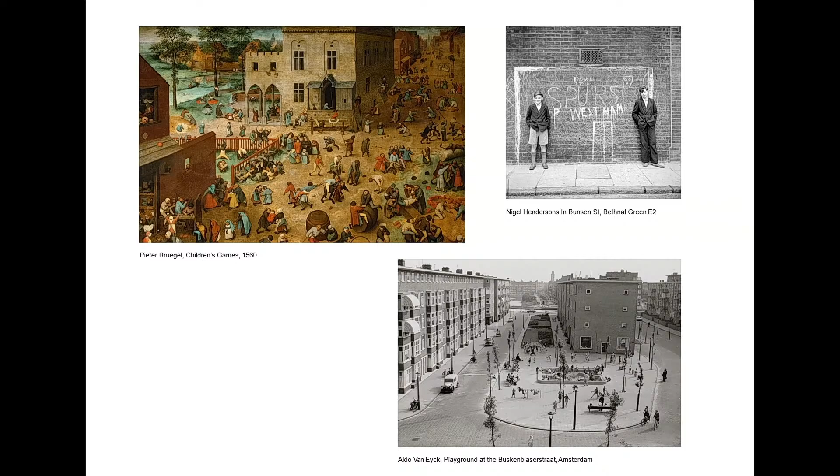So we like to mix the scale, and this desire to mix scale led us a few years ago to explore sports and play in the city, which is this rare moment when uses emerge quite directly from space. So in 2014, we proposed a research to Pavillon de l'Arsenal, a Parisian Institute of Architecture, on the typology of sport in Paris.

Traditionally, architecture for sport is considered a technical topic drawn by specialist architects, but we had the intuition that it could be a subject of research and experimentation for architects, as in our view it's a very urban typology, with super varied urban situations, from spontaneous practice like running, to infrastructure like the Parc des Princes.

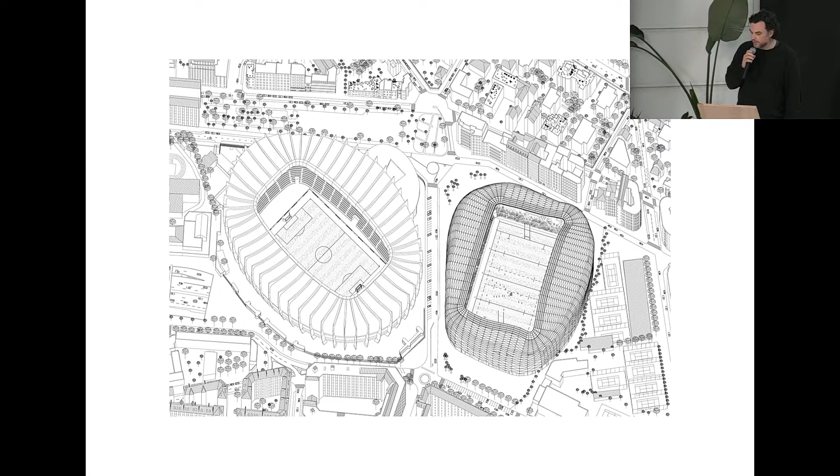This research was a pretext to talk about urban architecture, about spatial situations that create the atmosphere of a city, its climate and its specificity. We do believe that at the end, architecture is an urban matter. Architecture needs for us to have an urban intention in its genre. It is a convergent moment of space feeling and city feeling about climate.

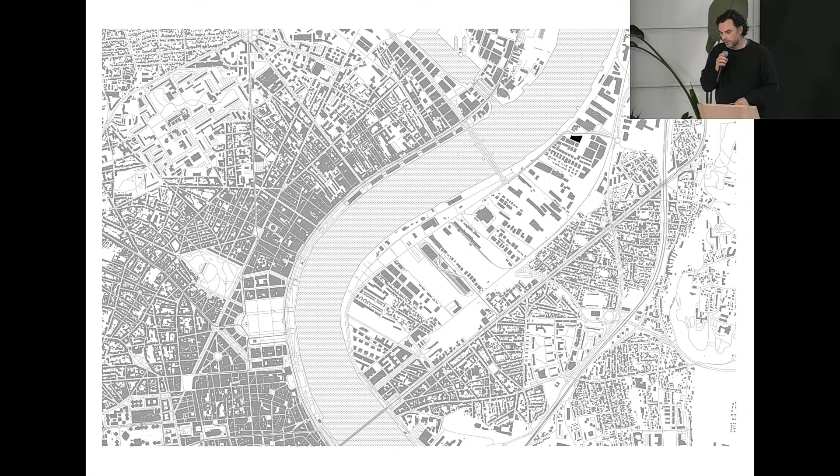So the first project is in Bordeaux. It's a sports project, south of France, close to Spain. It's out of the city in a neighborhood which is in total renovation. It was an old fabrics district, and the city asked us to create a sport facility, a building which hosts a sport facility.

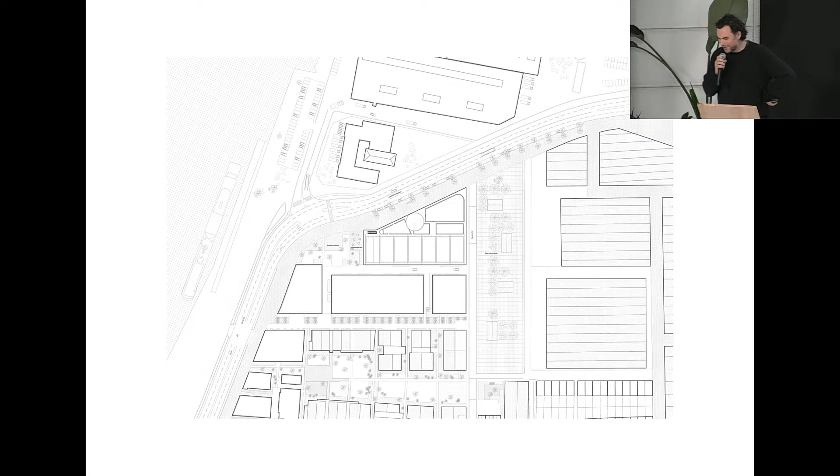But everything around is new, and there was an urban planner, an urbanist, who wanted a building that has the power, the possibility, to activate public space, as everything is going to be new and mostly around the dwellings.

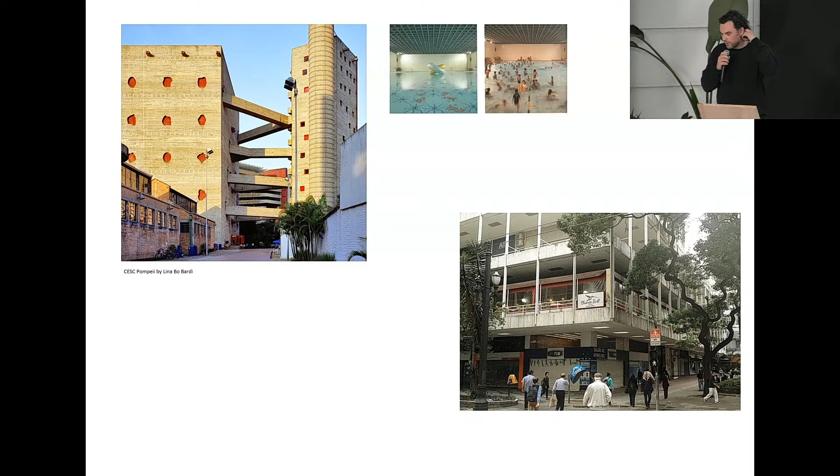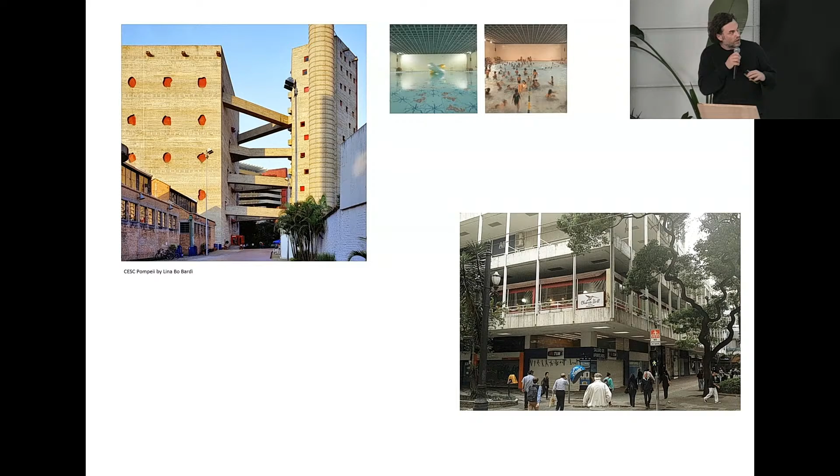So for a vertical sport facility, we obviously had in mind the CESC Pompeii from Lina Bo Bardi, which is largely made of a platform 100% dedicated to sport, and which is also largely open to the city with these red windows.

So we propose a building that is very open to outside, a kind of layering of urban planes, which hosts a large variety of sport fields, like golf, climbing, etc.

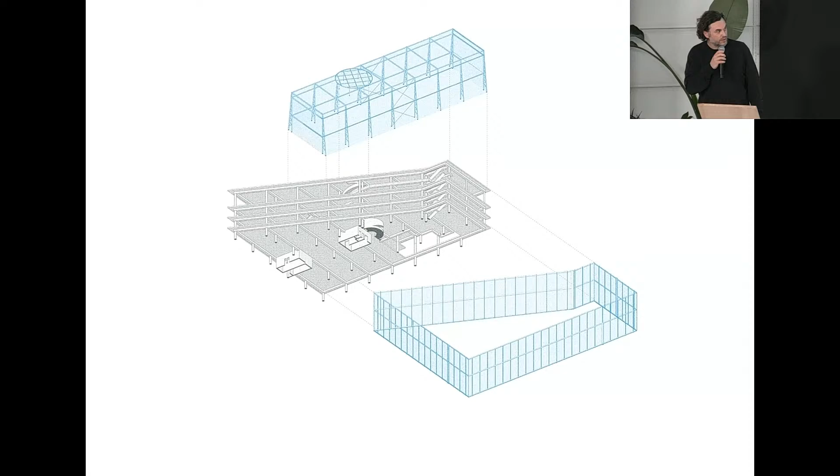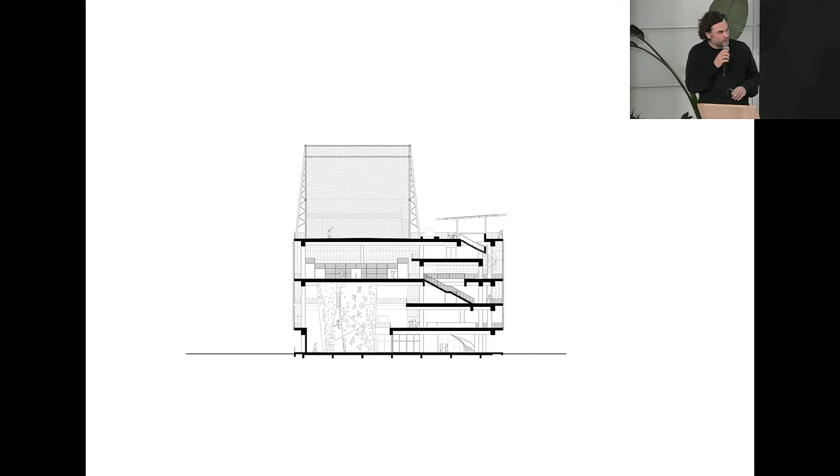Here you can see the structural principle of the building, which might appear really simple. It's like a precast building, everything is really regular. But when we look at the section, the construction reality appears, and we can see that the regularity is stopped a lot of times to host spaces which are really larger and some really tinier, with a large difference of events.

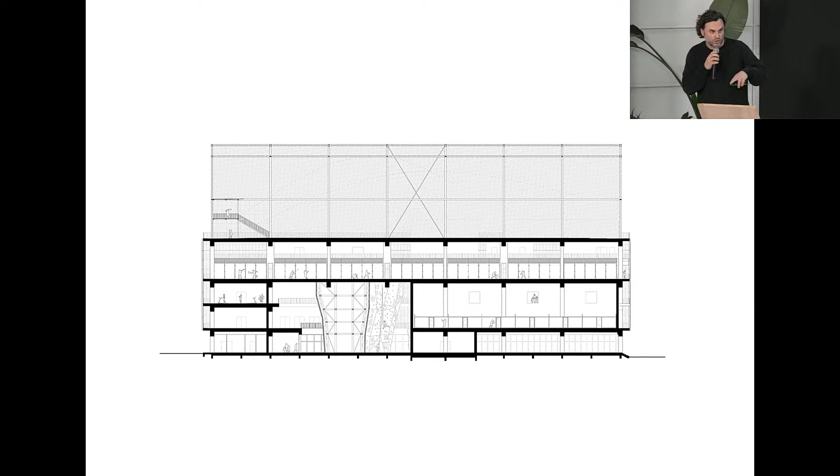The building which is built is like 20 meters high, and on top of it there is this golf practice cage which doubles the size of the building. So it's a 40 meters high building at the end.

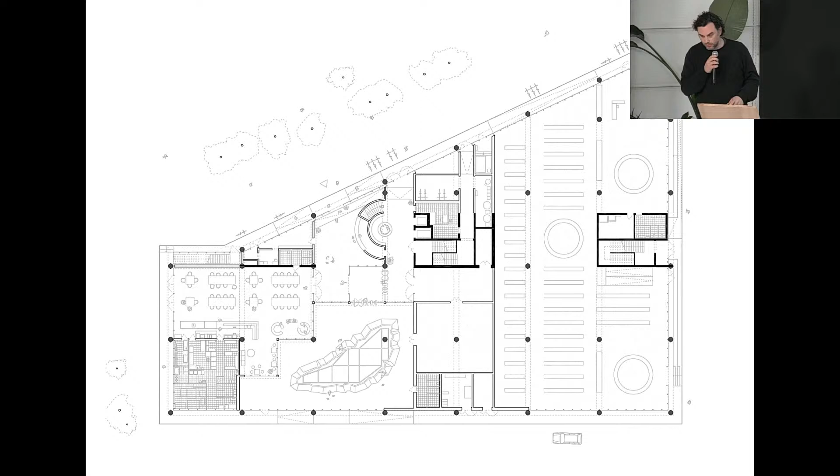So here is the ground floor, where there are a few spaces which are inside, I would say, like a restaurant and some shops on the right. But most of the building is an outside program, and we like that the plan is totally not efficient — only 30% of the building is heated inside space.

So there are 3 different kinds of space: the heated one, 30%, the one with programmation which is something like 50% more, and 20% of the built surface which is only circulation, large circulation, dedicated to improvisation and something that we can't manage, but the life of the building.

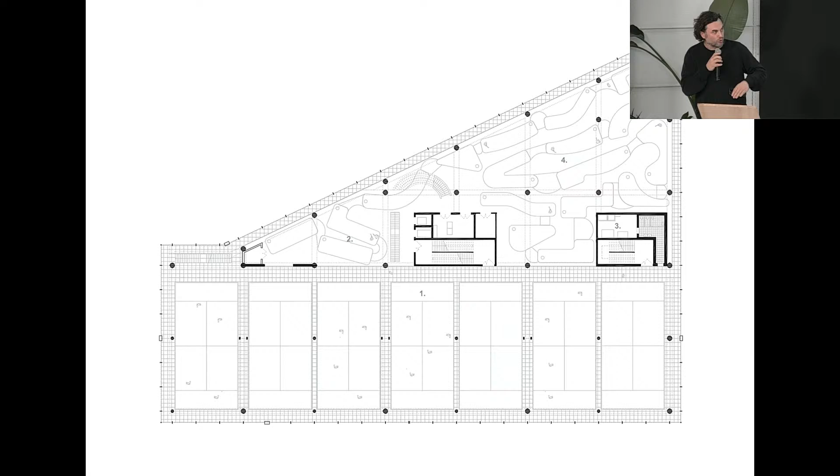This is the largest surface, it's 10 meters by 20, and so all the building is about 10 meters by 10 meters grid. And the roof plan with the golf and the bar facilities.

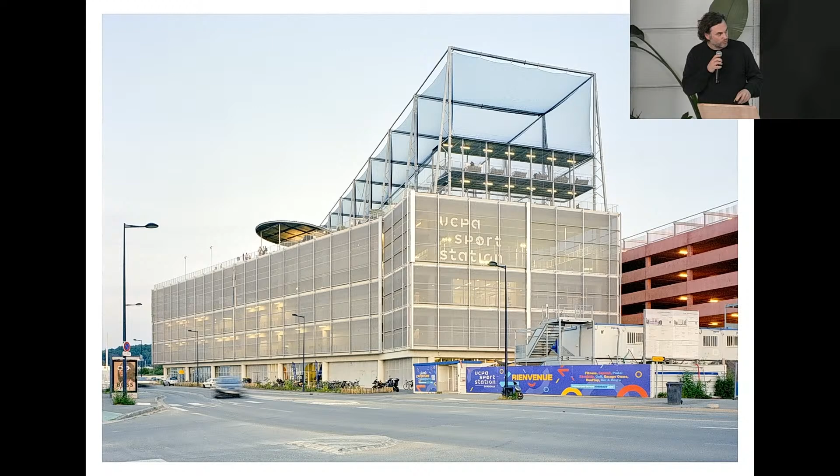So the district around is not completed yet, everything is in construction. If you go there now, it's a bit more constructed, but more or less it's like this. This picture is one year ago.

For us, there was this question of how a building can discuss with the surrounding. Creating this outside space inside a building was an economic strategy for sure, but it was also the possibility to create this kind of moment where the facade is totally removed and totally open to outside.

So the facade is built with a net, like an agricultural net. It's one motorization for the 70 meters lines of the facade, so one motor for each facade, not more.

It creates this moment where all the circulation inside is visible, all the activity is visible, the in-plus activity, let's say, not the pure sport, but when you are training or doing your stuff, you are outside and linked with the surrounding.

So there is a super regular structural frame and some spaces which are programmed. It's not superposed, everyone has its own specificity, because sport is one of the programs which you can't negotiate with, the dimension of the sport field.

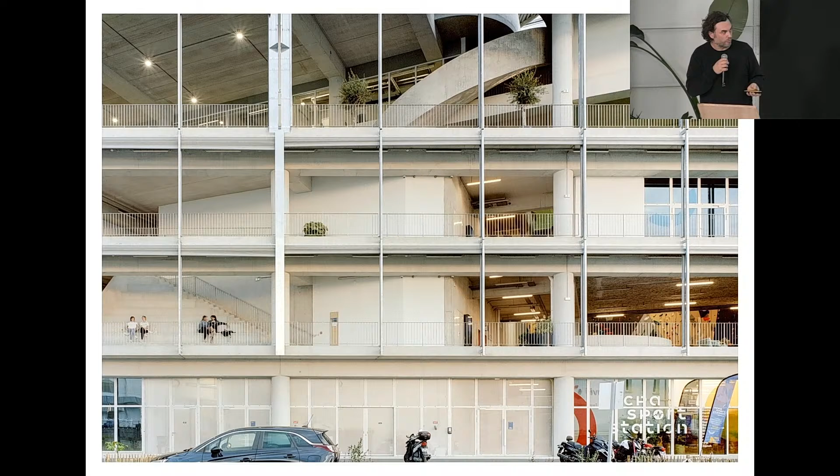So we are on the third floor in a golf moment, and we are quite close to this net facade, which is black from outside, but from inside with a counter day, you see clearly to outside.

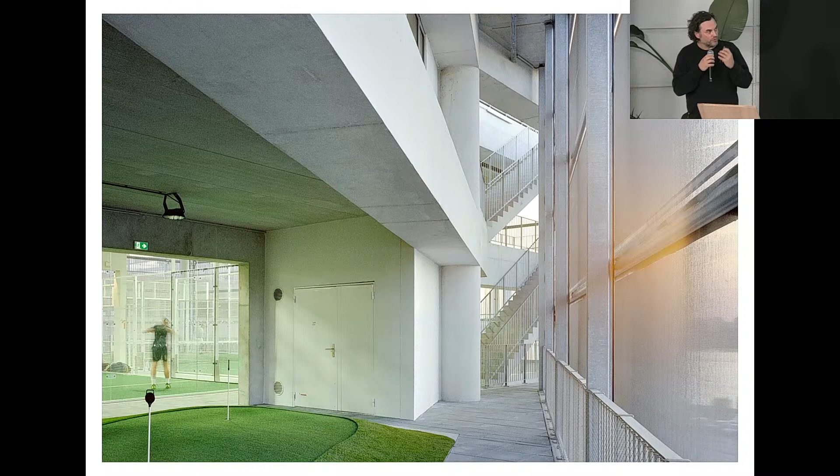The interest of this facade is clearly climatic, because it's created like in agricultural buildings. It's for wind, it's to stop wind. It stops more than 70% of the wind, and for sport that's something important.

So inside it's quiet. I mean, during winter it's cold, but it's a sports moment, so you can practice sport when it's cold, but you don't have this feeling of wind that can be difficult to deal with.

It's also efficient during summer because it stops all the sun, and it was also a longer study because there is also this fire constraint that if we don't want, for economic reasons, to have a lot of machines to deal with the smoke and etc.

It needs to be 50% open. So there are a lot of holes and it's 50% open, but it creates this nice moment where you are protected inside, but you see clearly outside.

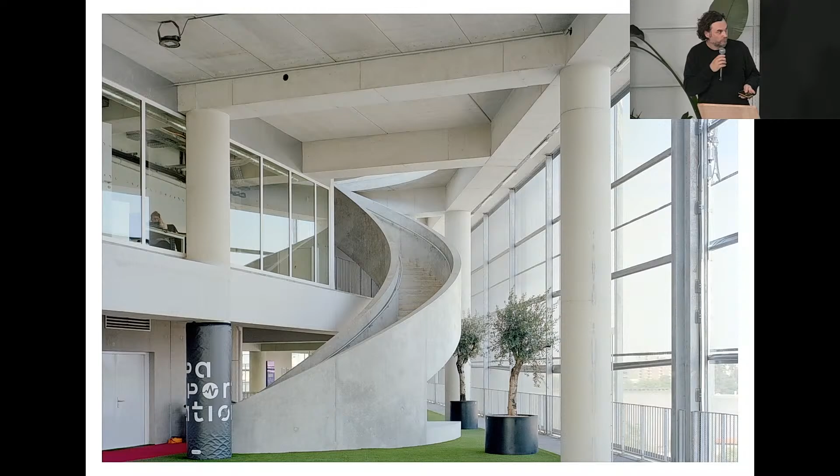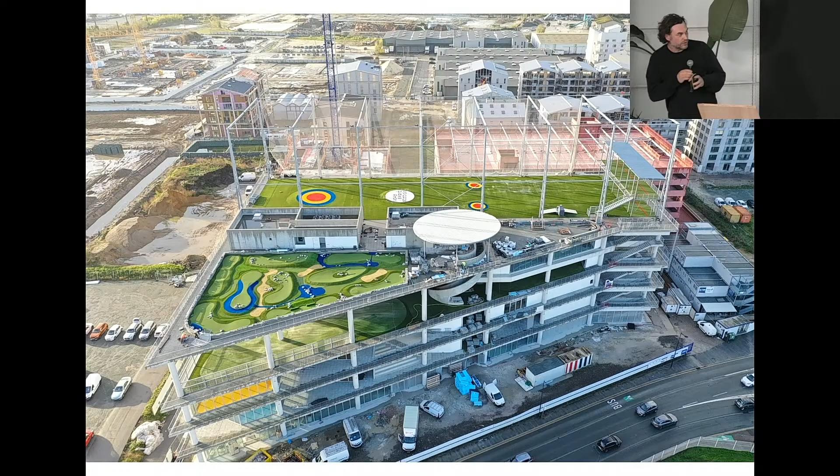So this first series of photos was made by Maxime Delvaux, and a few months ago our friend Antoine Espinasseau came, and the building started to live, like life.

We were super surprised and interested to see all these people all around, with the guys exercising themselves all around the building before practicing sport. It's really pleasant after all this engagement to see life in the building, but particularly on this building, which is about showing the practice everywhere.

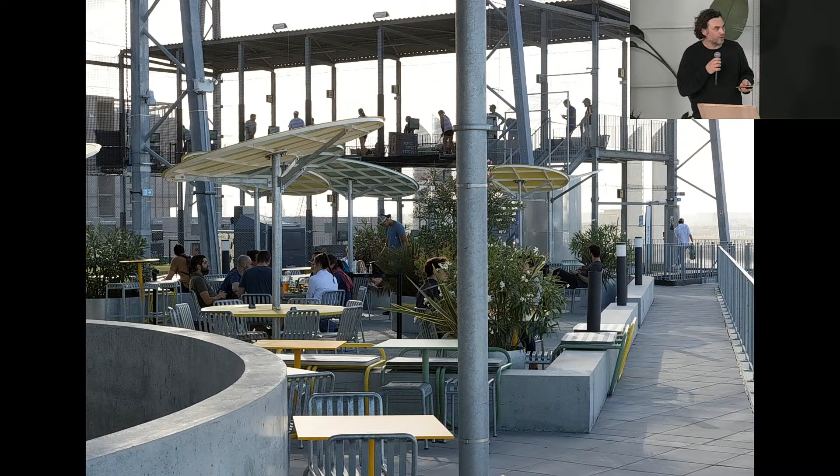So it's a bit more in construction, but still, depending on if the net is open or closed, the entire building evolves depending on the situation, on the climate situation.

So the second project is not a sport one, it's an architectural school. It's a contest that we won like 8 years ago. It's in Marseille.

I don't know if you know the old school of Marseille, but it was in a kind of lost paradise, close to the sea, like some American campus typology, far away from the city. And at the moment they needed to renovate this building, they took the decision to put it back in the center of the city.

And we started our study over there, in fact our first two years. And we were a bit questioning ourselves because the building is super nice, it's a super nice moment to live, and it's a good building to learn architecture.

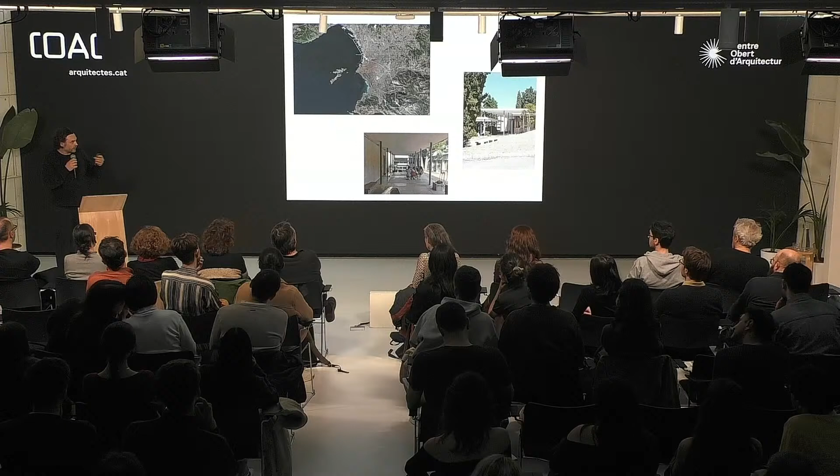But also putting the architectural school in the center of the city, we saw it like a political moment to bring back the school where we speak about the city. Being in the center was something that was also interesting for us.

So it's 3 schools of urban design: the School of Architecture, the School of Landscape, and the School of Urbanism. Three different schools, and there is this goal to make this building speak with the district, but also to let the 3 schools merge their students. So we built 3 different buildings, but to mix the different functions.

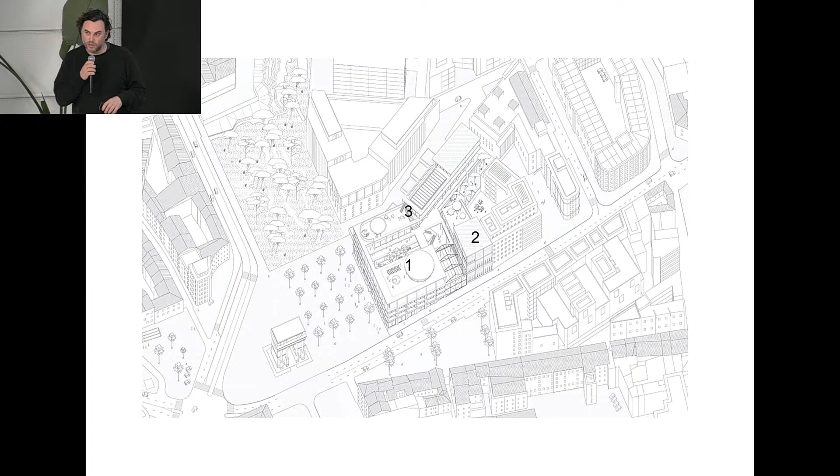So 3 buildings, but not for 3 schools. One is dedicated to common space, like administration, a library, etc. The second is dedicated to research and experimentation, like a model workshop. The third is dedicated to the students, so a students' workshop. So all the different school students and functions are mixed in the different buildings.

It's in the center of a city, in a patrimonial moment. So we also had this question - I mean it's a school of architecture, as we used to learn over there, and it was a bit larger. We were young at this moment, and it was a big subject for us, and plus it's in a patrimonial surrounding.

So we discussed a lot with Jacques Lucan, who was part of the team, a researcher and historian. And at the end we found these references of Italian palazzo to speak of what could be regularity plus exception. And those have been made over time, so they evolve.

So it's clear, when you are far away you see something super classic, super composed. When you look precisely at the different moments, you see it was an old church which became a city town hall. So you feel you understand how it was made, but from far away it's something really composed.

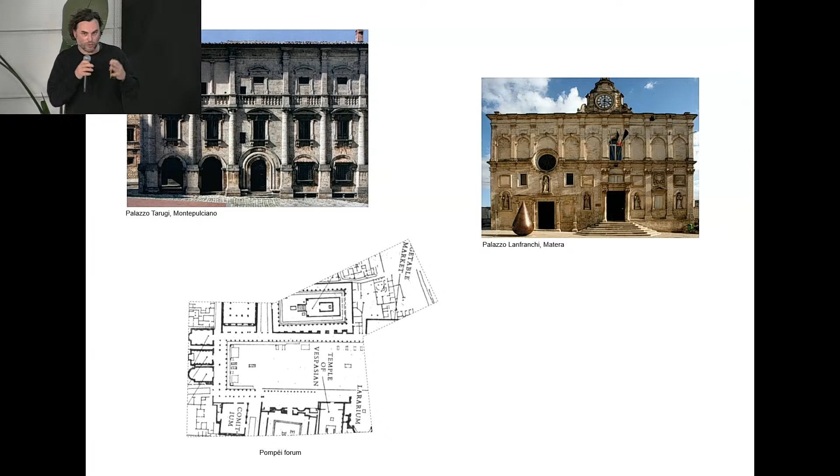So we quite like the idea that a building can be read from far away, but it's different when you go closer. So here you see the 3 buildings, which also is a bioclimatic strategy, because there is a lot of wind in Marseille.

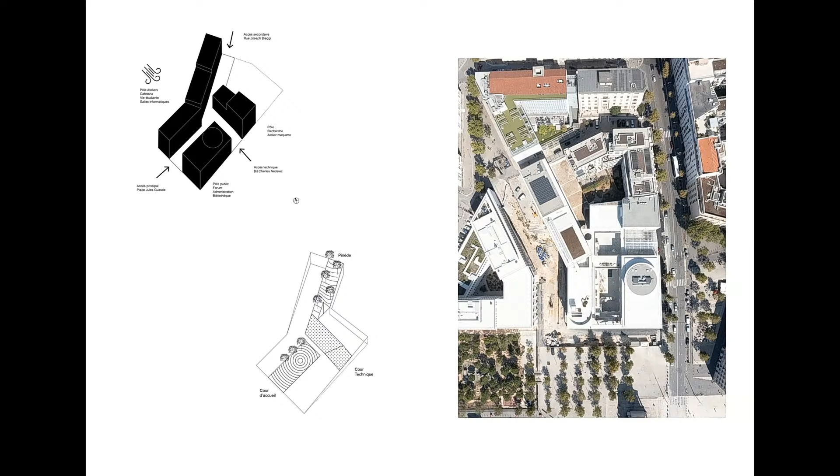So the long building is stopping the wind. It's 13 meters deep, so all the students' workshops are open on each side, so you can do ventilation quite easily. The public building with all the large moments like a forum and library is 20 meters deep, so there's a lot of inertia.

And the research one is open, has a different facade. So these 3 buildings create 3 different voids, which are also aligned with the topography of the site, which is 10 meters difference between the lowest point and the highest one, and each one has a different thematic, let's say.

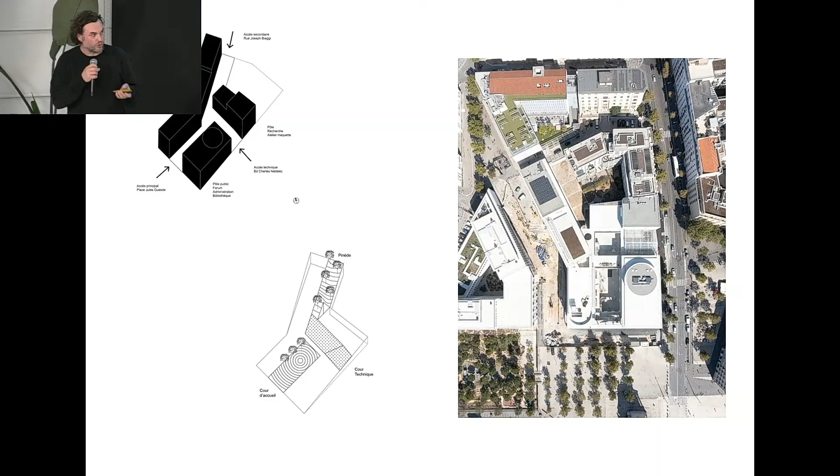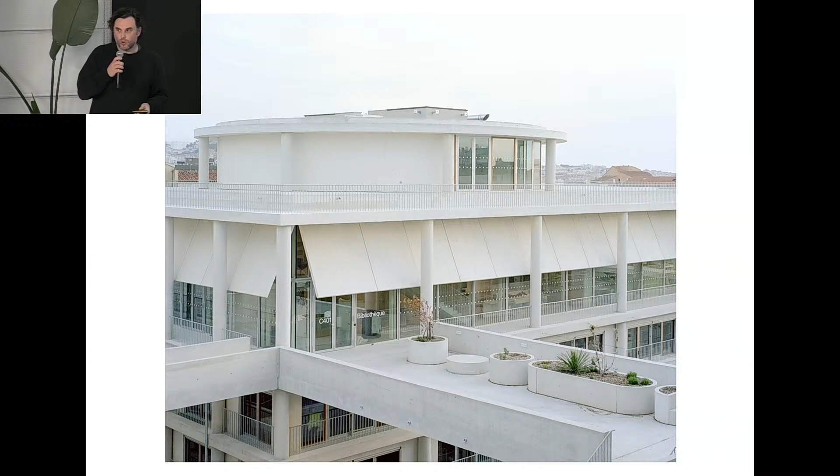So we had this sentiment that each building is different, each outside space is different, and we are trying to compose like an urban campus, like a small city moment. So here it's delivered right now. The students went in a year and a half ago, September last year.

And we see the public building, the common one with the library, the research building on the left with its own exterior space, dedicated to experimentation. So the modeling workshop is on the ground floor, and all the facade can open to let the students go outside and manipulate between inside and outside. Plus there is this canopy which protects the different models you are producing.

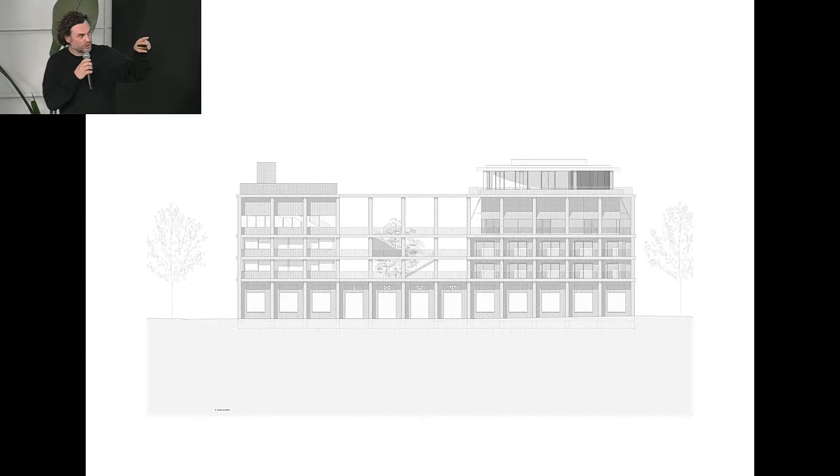So the first floor and the fourth one, the third one is special because they have 6 meter ceiling height. So here you can see that there is a standard floor, and when you are in the library it's a super high floor.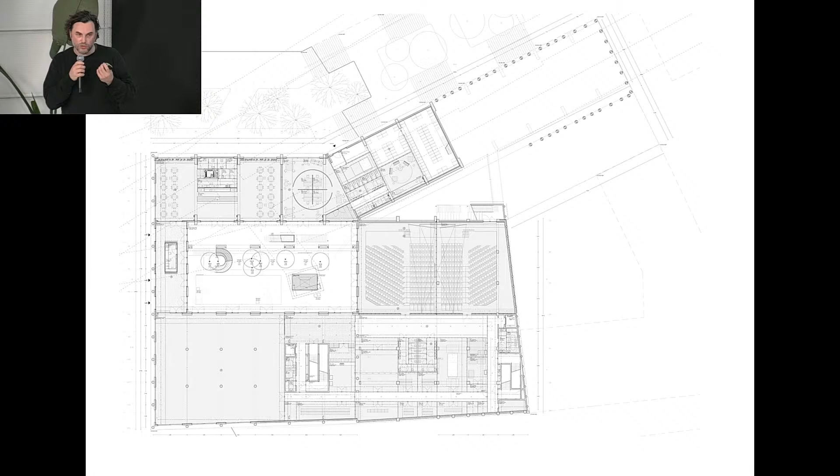Here's the ground floor, the more public one, the forum, which is the moment where the school discusses with outside, shows the students' work. It's in the most public angle of the project. You have the entrance courtyard, the auditorium on the back, and the cafeteria on the left. So all the life of the most intense moment of the school is at the same level on the public ground floor.

Here it's the second floor, like a generic one with all the student workshops of 100 meters aligned like that. But you can see the structure, but also in dark lines the partition wall, which are in wood and can evolve.

So it's like a super strict system, but it can be removed, at least for the partition wall, to create a large room if the scolarity evolves. And on this special fourth floor, where we can find the library and a specific moment of the research, which is like a high room research dedicated to manipulation.

We discuss a lot about what is research on architecture. In France, the researchers are oftenly in the back of a school. They are not visible. The students don't know what they are producing. And we believe that it was super important that they are in front, in the middle, to create debate, to animate the school, because they are every day there.

And this moment is a laboratory dedicated to research about materiality, which is clearly what is going to be important in the next years. So we thought that it would be nice that it's at this level, in the middle of an intense floor. And here the student workshop evolved. They are super high, but also super large, because it's 1,200 square meters room with large doors, which can create like 3 or 4 rooms.

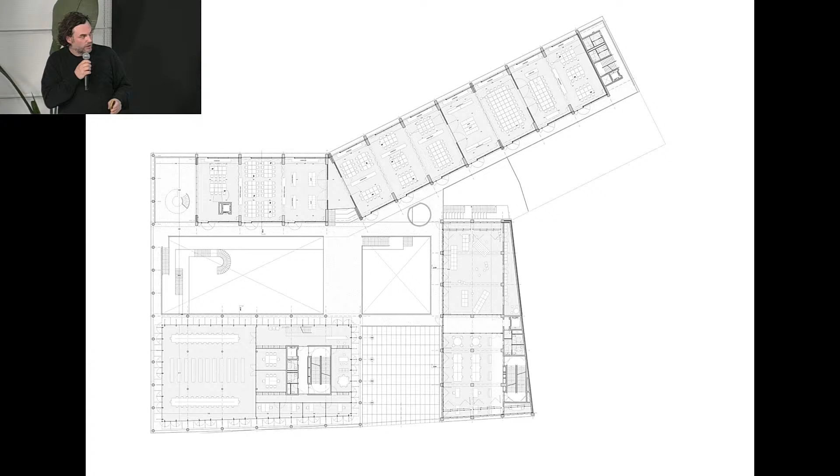And to link all this space, there are some bridges, and I don't know the name. Sorry.

So here is the forum, the auditorium on the ground floor. What I didn't say is that a specificity of the historical school of Marseille is that all the circulation was outside, and it let the students work between inside and outside.

The circulation are really large, and so is the classroom, depending on the weather that you also have over there. For us it was a super Mediterranean way to learn, to practice your school, is to be in between inside and outside.

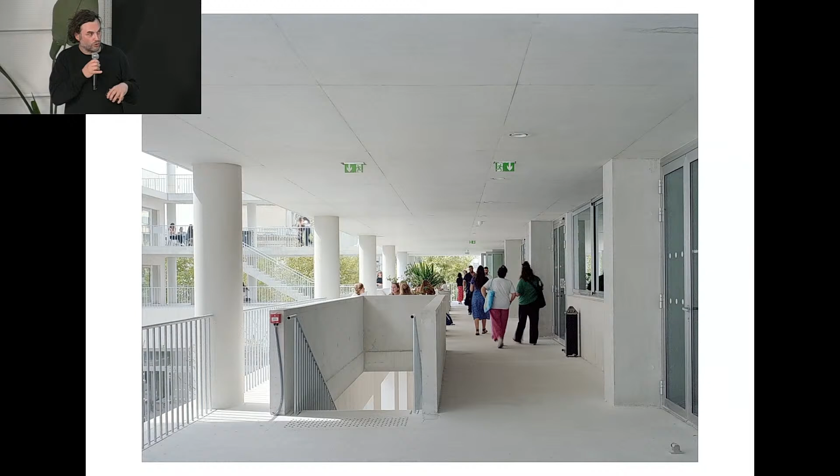So all the circulation is outside, and the workshop can open largely onto this corridor, which is 3 meters large, so it can really go over there. So here are the large workshops on the third level, and the library.

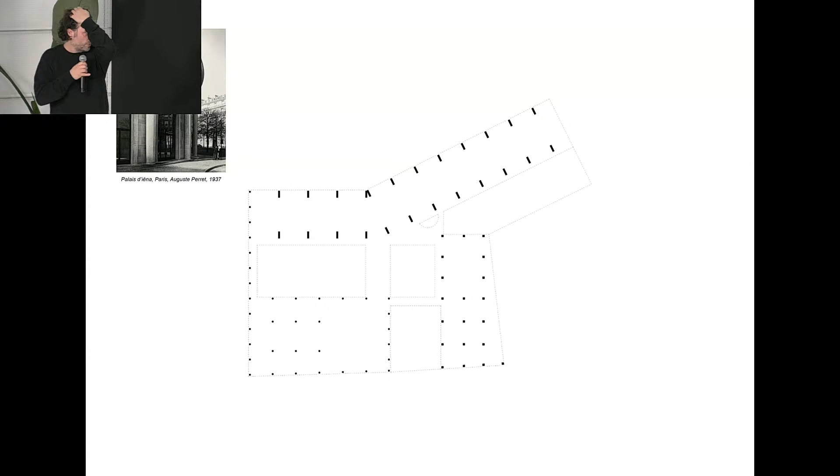To speak about structure, we have 2 main references. The first one was Palais d'Iéna from Auguste Perret in Paris, which is like a super strict building, super classical, but which in terms of structure is super in advance of its time. So it's only columns, structure is not a problem to make the building evolve, and it was before an exposition building, and now it's dedicated to something else, I don't know the name in English, but the occupancy changed largely, and this structure was adaptable and able to host different kinds of programs.

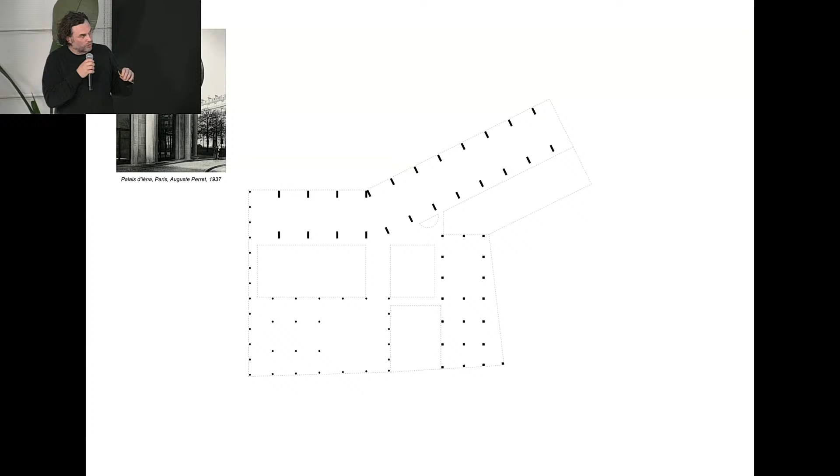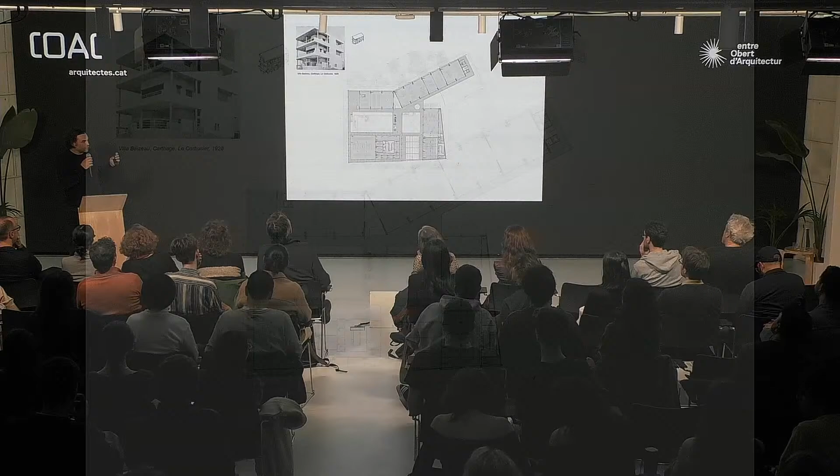And so we believe it also because there is our concern to use the minimum of concrete, only what is necessary, and so we thought that punctual structure was the good response. So there is this layer of only point structural elements, and in addition, what we call a protecting skin, made of 10 centimeters of concrete, as on the Villa Baizeau from Le Corbusier in Carthage, which can create the diversity of moments that I tried to explain before from the Italian palazzo. So it can adapt to the different conditions of the program, but also to the climatic condition.

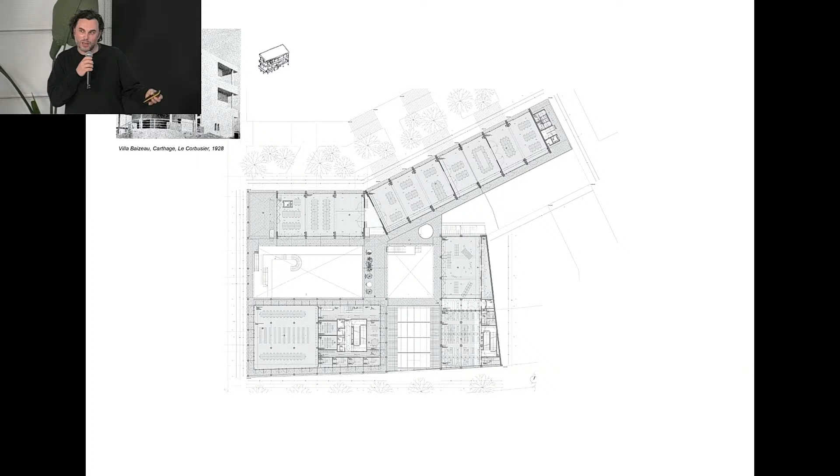And so here you can see the 2 different concretes. The gray one, which is the structure, and the white concrete, which is only a protecting skin, it's 10 centimeters - the minimum from French regulation to produce concrete, you can't do less. It's protecting the insulation which is behind, which is in wood, with a wood panel to protect from inside.

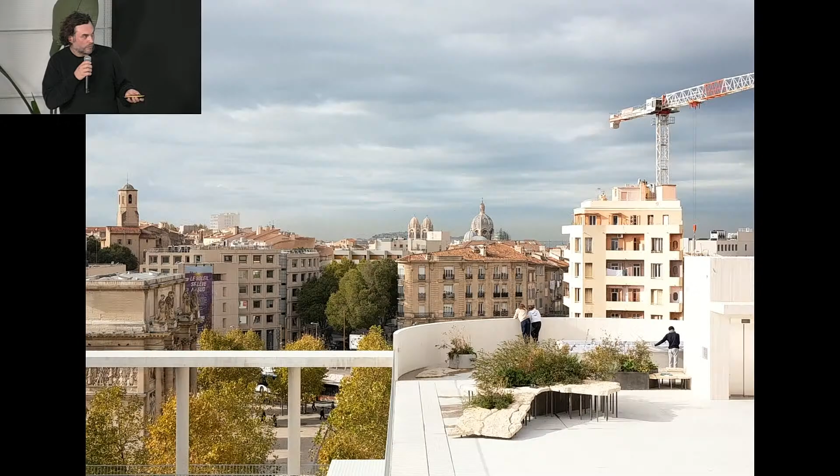So from the main entrance, and as in Bordeaux, it's quite comforting to see that students live more intensely in the space than we try to work on.

So we also worked on the furniture. The client is the French Ministry of Culture, so it's the ministry which is in charge of architects, and they try to defend them. So it's the best client in France, I believe.

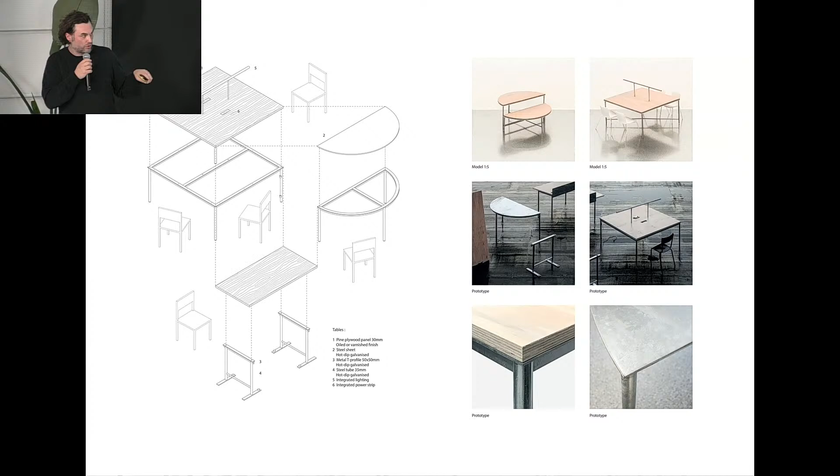And so they gave us also the mission for the furniture, and we tried to work on it - the name of the project is IMVT, and we tried to do IMVT furniture using the same material that we use on the building, and the same dimensions. So the wood of the table is the same that creates the partition wall. The steel is the same as the handrail, and it's a total building like in an earlier century when the architect was doing everything. We tried to do a total building.

So yeah, you see here the partition wall and the table, which have the possibility to become like a panel for presentation.

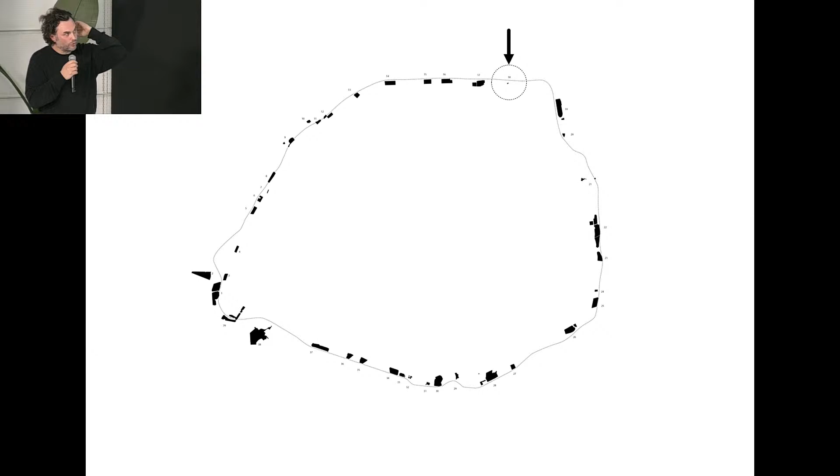I don't have time, so maybe I'm too fast. The third project is the arena we delivered last summer for the Olympic Games. This map was done when we did the research about sport in Paris, 10 years before.

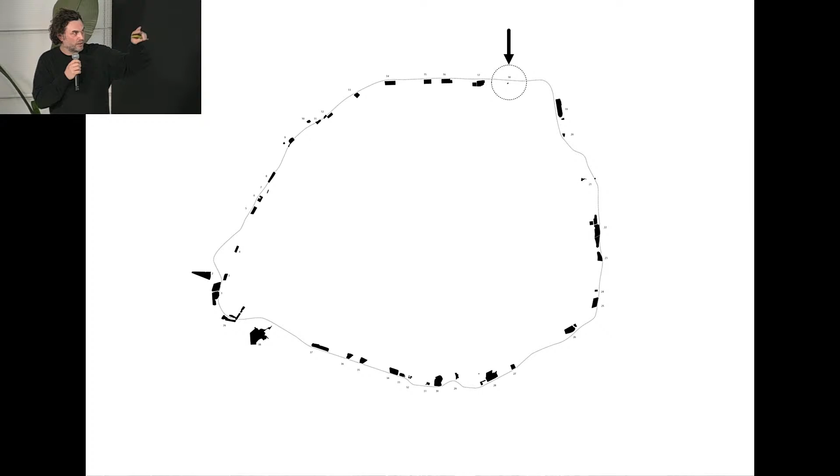It's a map representing all the large sport facilities in Paris. There is only one soccer field in the center of Paris. All the others are on this perimeter, on the peripheric, which is the highway that circles Paris. We intervene on this moment of the city because, as it's a highway, it delimits Paris and creates a big artificial limit between inside and outside. You know when you're in Paris and when you're outside, mainly because of this physical limit.

So one of the questions was how to, and the big question of Paris is how to blur this limit, how to make it unclear and let it grow in its urban substance. So we worked on this theme with two artifacts. The first one is to say that the upper part of the building is the metropolitan part.

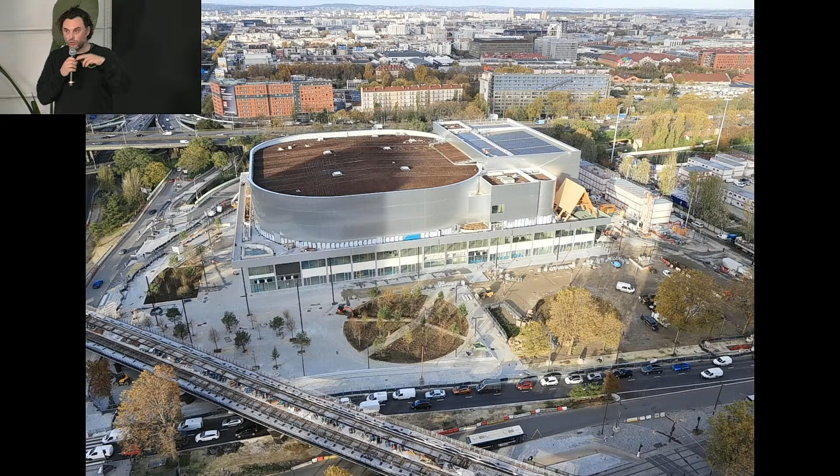It speaks of all around. It's a round shape, no facade, no alignment, no direction. It's really speaking to the context. And the two first floors are a more classical building, a Parisian typology aligned on this parcel.

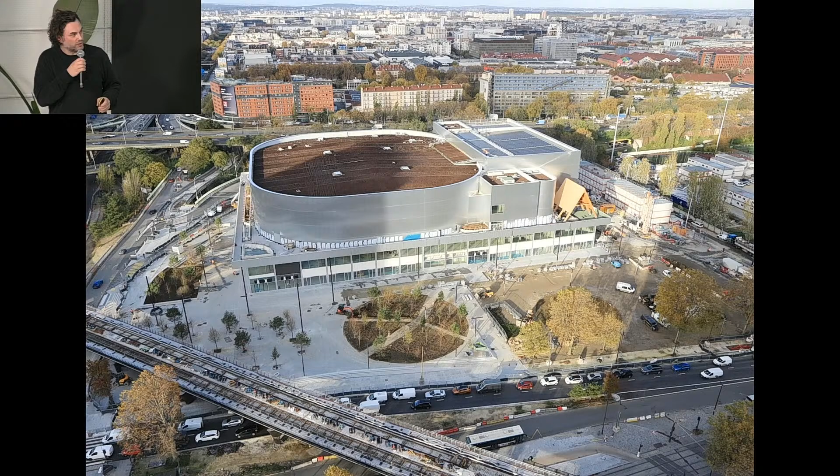Paris is like an extrusion cake cut by a street. It's a super dense city with only streets and buildings, not a lot of exterior spaces. So here we clearly see the alignment of the two first floors to the plot, and on top of it, the circle.

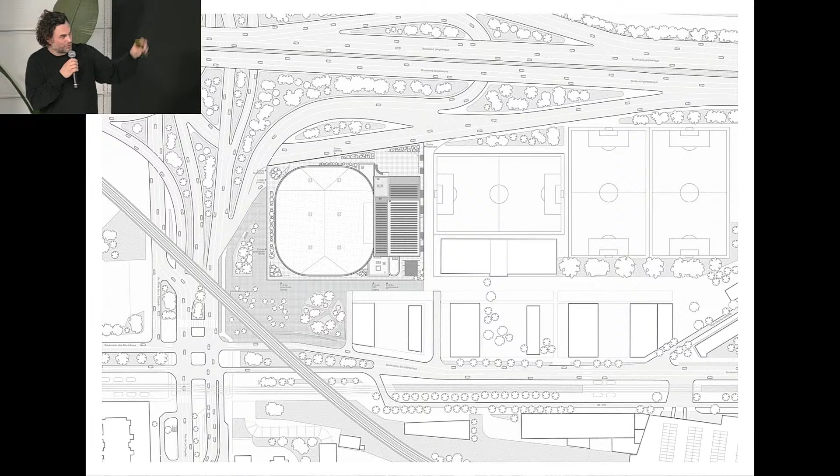The site was quite difficult because of a lot of infrastructure: the peripheric, the highway starting over there and going north of France, the trains on the left, the subway on the diagonal. So it's a really hard moment of a city.

Sports usually are like an open-closed moment of a city, really closed onto itself, not like a theater could be, which can really feel like a public moment. We had the Opéra Garnier project as a reference, to see that it can be considered like a theater, a new kind of theater.

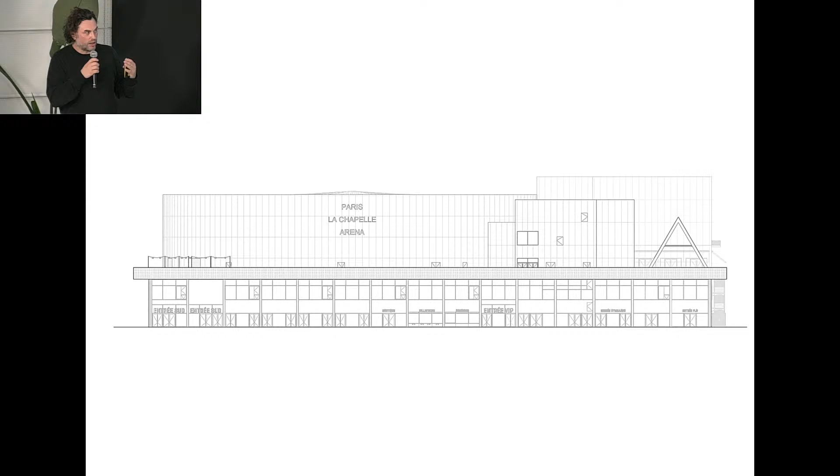So the two first floors are totally glass, with a balcony on top of it, and this blind facade above. It's a complicated machine because there's a lot of management of flux and entrance of different people, different sportive artists.

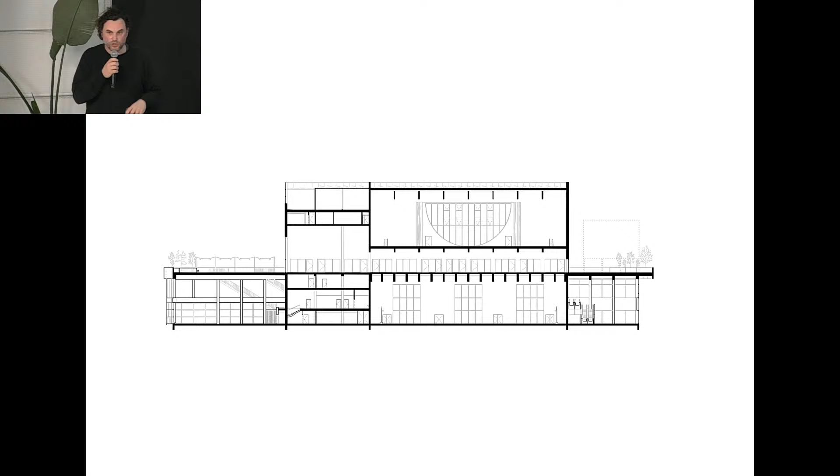But in addition to this, the particularity of this project is that there are two municipality facilities, which we can see in this section: the first one is a gymnasium, and on top of it there's a gymnasium dedicated to 5x5 soccer, with 700 people who can be watching it.

In the middle, on the main terrace level, is a space dedicated to restaurants, which is open all day - at the opposite of the arena, which is open only 5 hours every 3 days. This one is really open from 10 in the morning to 11 at night, creating a different kind of equipment dedicated to sport, open at every moment of the day.

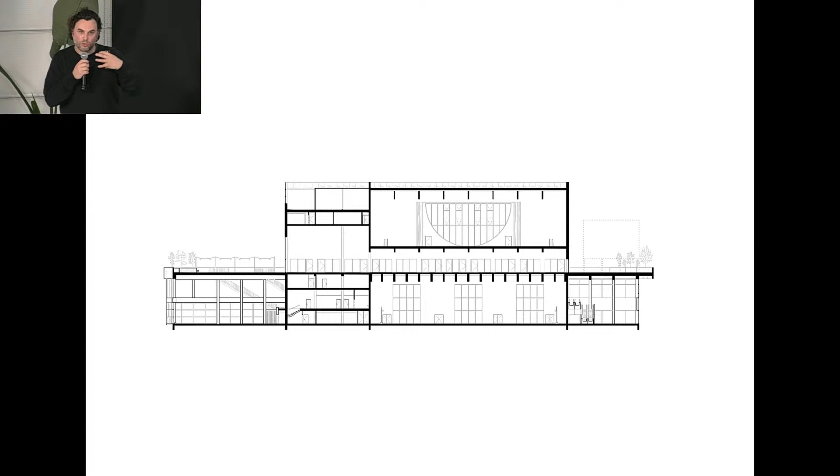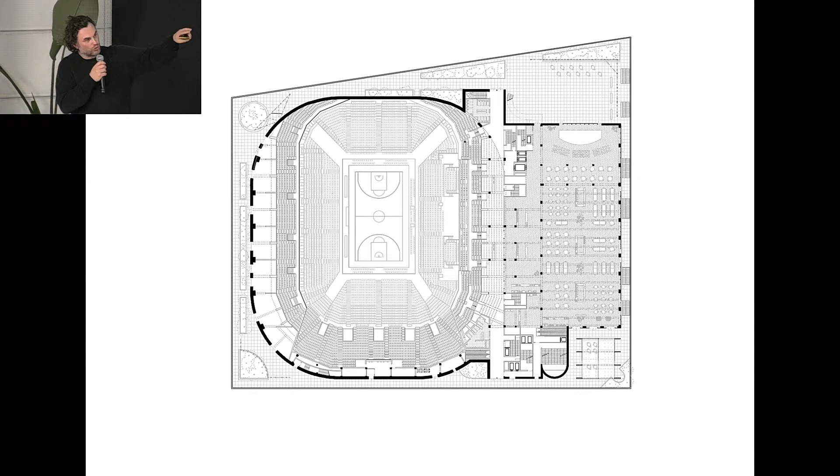So you see on the right the gymnasium, the municipality gymnasium, with all this problematic of the flux. And here is this restaurant moment, which is not a real restaurant - it can be everything. There's a concert moment on top of it, some different restaurants. It's like a large courtyard, with all this balcony moment around it, which lets this space go outside and have its own small plaza.

The balcony is the moment where all the circulation of the opera happens. There is a big stair inside, and then you return and go to this balcony, and you are in front of the city, then you go back to the main room. So we tried to redo this typology with all the circulation for the supporters or the public, which are open to the city.

So when they go up the level, they feel the sentiment, the climate of the neighborhood.

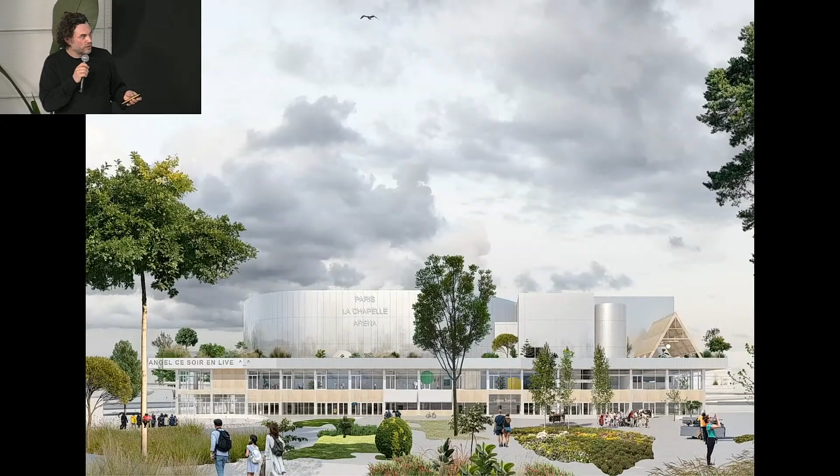This was a long competition, 6 months, so we did a lot of iteration. I'll show you what the first intention was and what it became finally. From the beginning, it was like a drawing we made 2 weeks after reading the brief, and it evolved finally to this picture, which is at the end almost built like it was planned.

Here is the facade, which is open to the peripheric road, but the one on the infrastructure is exactly the same as on the main public space, which is this one. You can feel the 2 first floors with the alignment, and the upper part, which is more blind, with this aluminium shells.

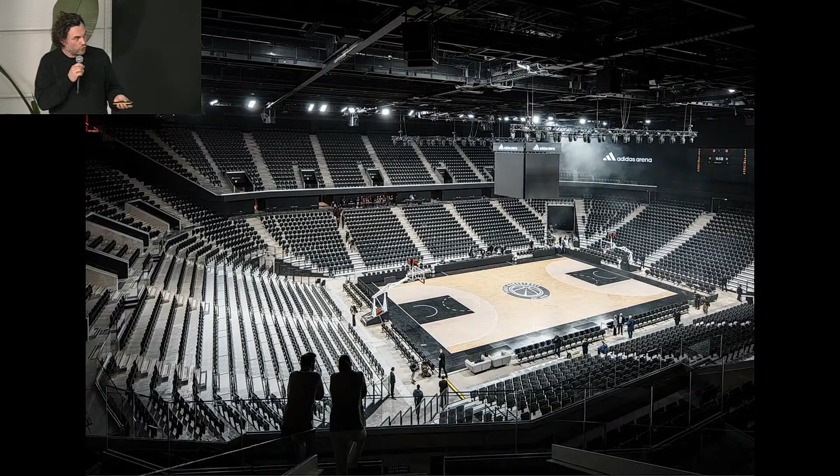And so now it's living. It's a super intense building with a lot of shows, it hosts sport events, but also concerts and a lot of things. It's really fun, and our office is super close, so we feel the building every day.

This project is in Brussels. We made it with Central, who are from Brussels. It's northwest of Brussels, I'm going to show it fast. In fact, it's an extension of a gymnasium, but with a complex program.

It's in an urban district which was drawn by 51N4E. They redid the whole district, and it's the same kind of project that I just showed you, but at a much smaller scale, with this complexity of programmation.

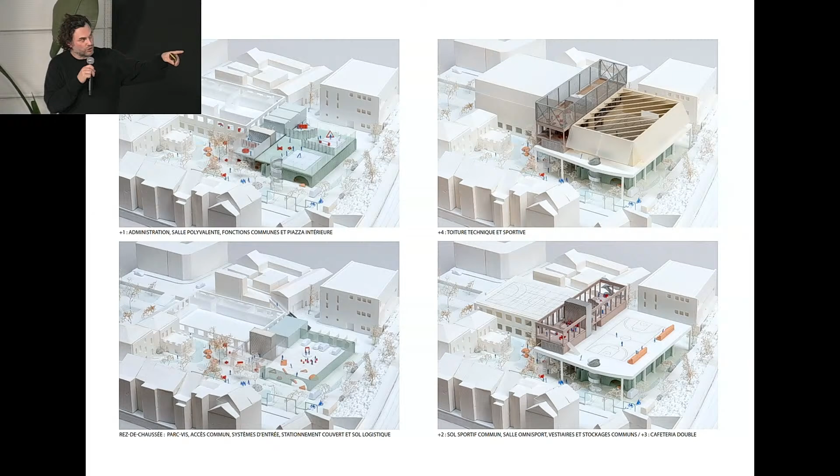Each level is a different program, independent of each other. It's like a big shelf with very different programmation. The first floor is like logistics plus a car park dedicated to the whole area. The next one is like a polyvalent room, a municipality event room, for weddings and such. And on top of it is the gymnasium.

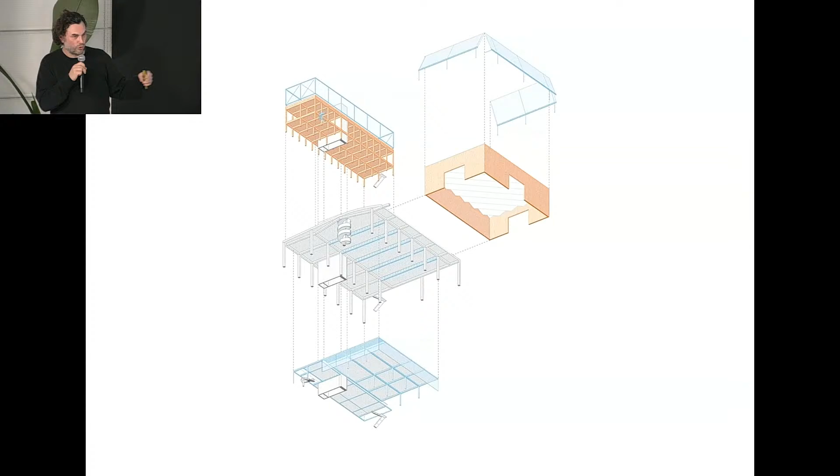The structure is quite simple, but each programmation has its own structure. During the brief it was also asked that the space could evolve deeply. For example, the fourth floor is in metal, so it can be removed and reconfigured super easily. There is this table of concrete, and on top of it the wood gymnasium. So a lot of technical complexity. It's simple up here, but we are trying to build it right now, and we feel the complexity of mixing the structures.

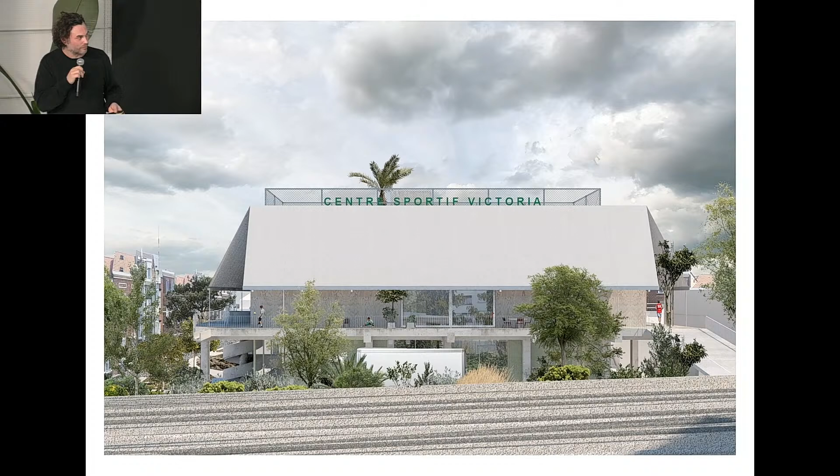As with the other project, the circulation is mostly outside, and all the floors have this large balcony, making the link between inside and outside more blurry and ambiguous, to create a building that is not composed but more like a machine dedicated to the district, to the area.

Sorry, I thought I did. I will go a bit fast because I wanted to.

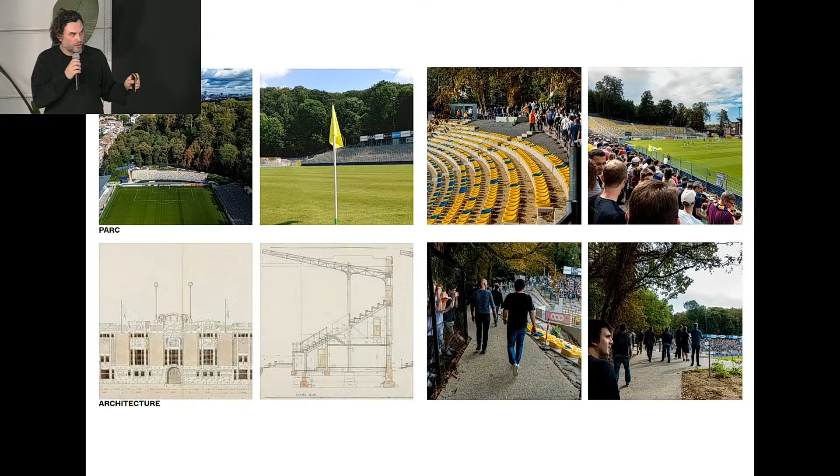So this is a project we did, a competition that we lost, but I will show you another competition that we lost instead.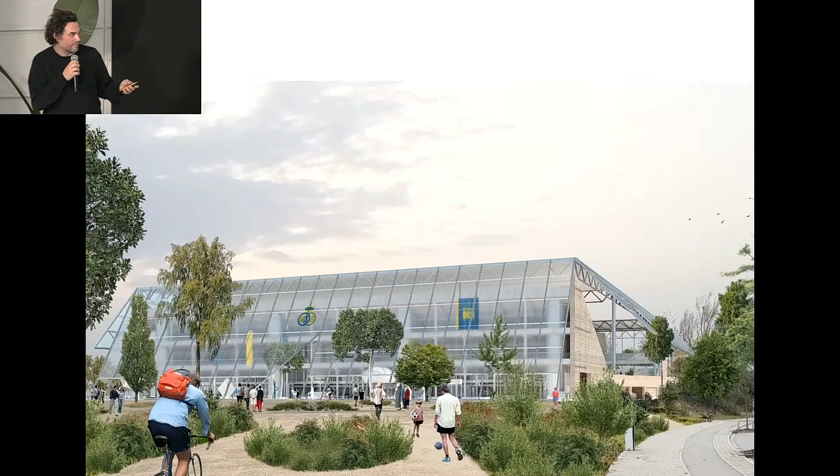So this is the project we made with Datae and Agencia Material for the FIRA. You probably all know the project which won. It was a competition we were super enthusiastic to work on, and we were... what do you say...

To lose was something really difficult, but I have to say that the project which won is nice. So it's not a comparison of projects, it's more to participate in the debate and show you all the work we've done and how nice it could have been.

The competition is for an exposition place for the centenary of this universal exposition. The city wanted to renovate all the pavilions, and there were 3 different competitions at the same moment. We were interrogated with Datae and Agencia Material on number 2, which is the Palais de Communication and Palais Multifunctional. It's in a really patrimonial moment of the city, in between the Catalonia Museum and Plaza España.

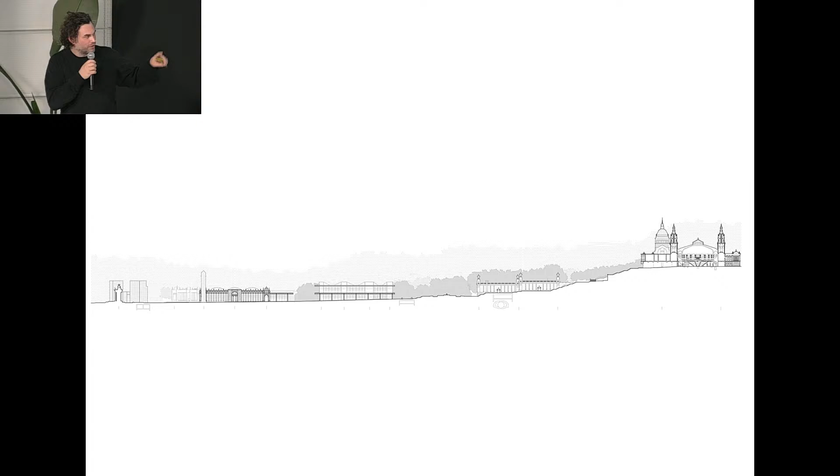The patrimonial prolongation was a big issue for us. It's about how to deal with an existing facade.

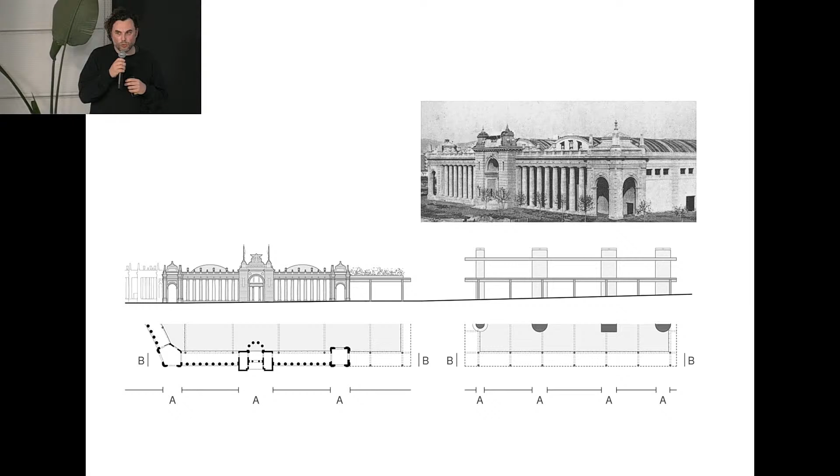What was nice in this competition is that the city wanted the district to evolve with this building project. So we tried to work on how the building can participate in the evolution of the surrounding, like urban architecture. There's the question of patrimony, how to deal with it and create something coherent. You can't add a new typology totally different from what was there.

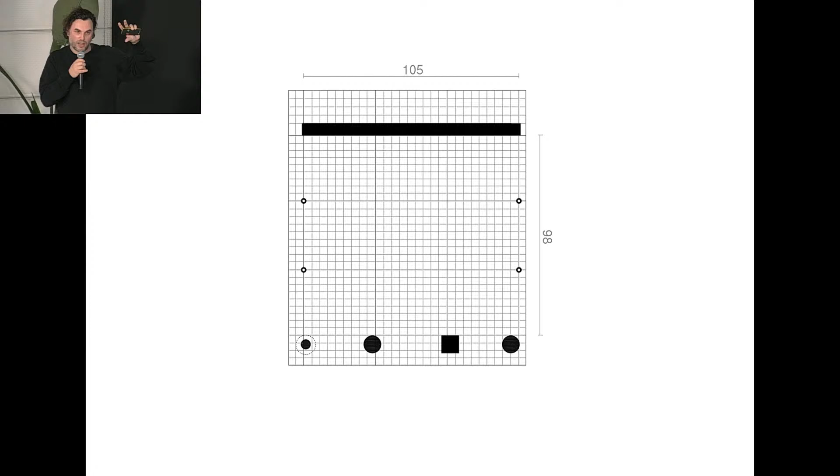The program was in a way super simple: it's 3 rooms of 10,000 square meters, a square room, 100 meters by 100 meters. Apparently super simple, but the size makes it hard to deal with. It's 10 meters high ceiling, so it's a really large moment.

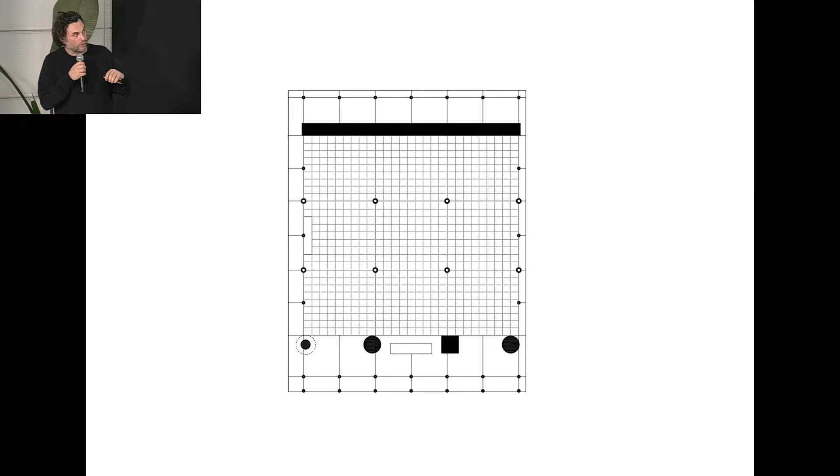In addition to this, there is this negotiation, or transition moment with outside, which is the entrance hall, the sun skin, and also offices, which were planned to be in prolongation of the district on top of it.

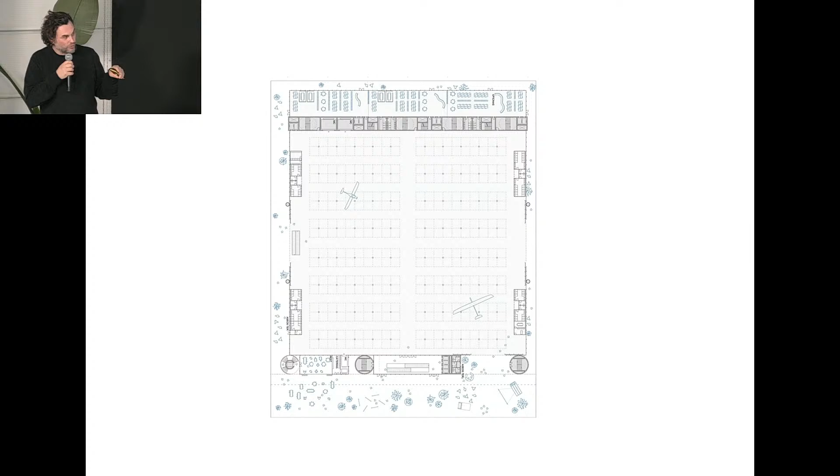Working on this square plan, we found a lot of references of urban machines, super open machines. There was a strong intention to do the most efficient place, since it's an exposition space, but also to deal with the quotidian life of the neighborhood - how can we mix this super organized, super efficient moment with the quotidian life of the surroundings.

Here are the first floors, and here is the ground floor. Plaza España is here. A new street is produced in between the two palais, and the new evolution of the city is on the upper part of the drawings.

What is also nice is that the 3 rooms can be combined together, so they can work independently each of them - we need to deal with their access - but they can also be mixed together to create a super big event. There is no such exposition palace in the city elsewhere in Europe.

Usually they are far away from the center of the city, so they don't participate in the evolution and the debate of the climate of the city. Here it was this question: how can we participate in the neighborhood, and not create something which is only activated when there is an event, but which is active all day.

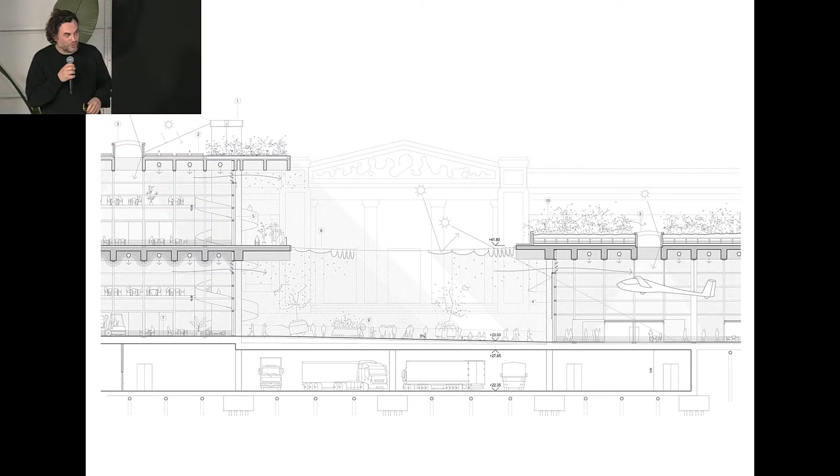Here you can see the 2 palais and the museum in the back. The street in between, that we tried to make like a climatic public space. When there are events working together, it was like part of the exposition moment, but when independent, it was a public space with sun protection and a climatic moment.

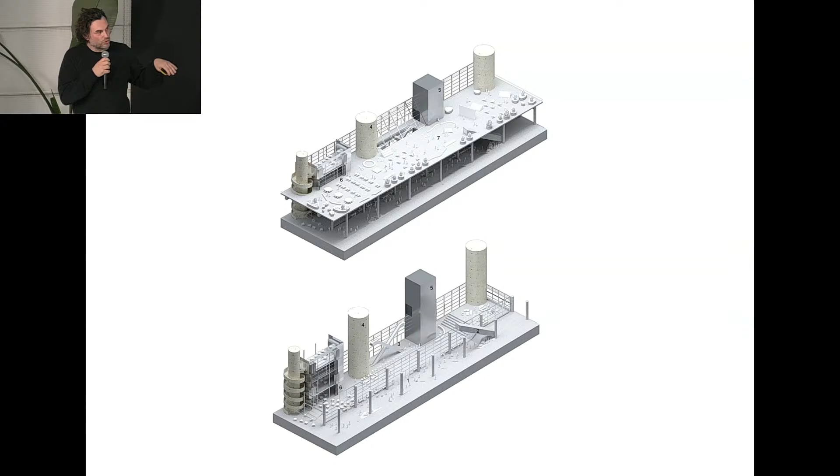As there are these 2 floors, the vertical link is something super architectural. For us it was important to make them appear quite easily, so all the stairs and elevators are on this vertical moment, plus the restaurant, which is on 4 levels in between.

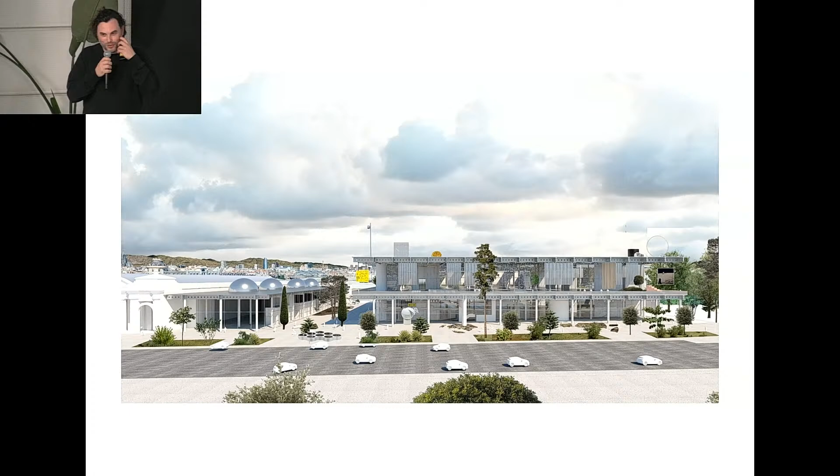As I show you, I put all the images that I have. So the first intentions speak about the machine, how it can be visible from outside. At each project we were wondering with Claudie, Daniel, and Paul, how it can be in between the good moment where it's speaking of a pure efficient machine and how it can be a public building. Each iteration is speaking of this, I believe.

At the end, the structure was a big subject, also because there are only 4 columns on the ground floor and no columns on the first one, meaning a 100 meter room without columns. So the vertical elements at the end were prolonged up to the last slab with cables to maintain the roof, and so it's at the same time the vertical circulation but also the structural element of the roof.

This one is at the final images.

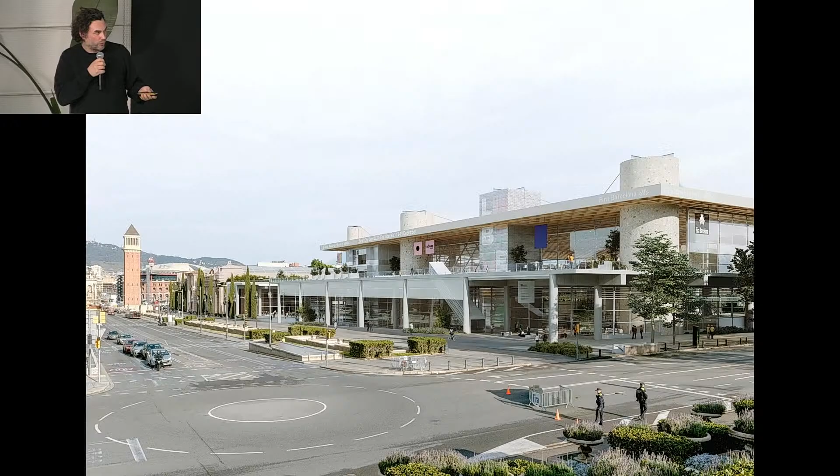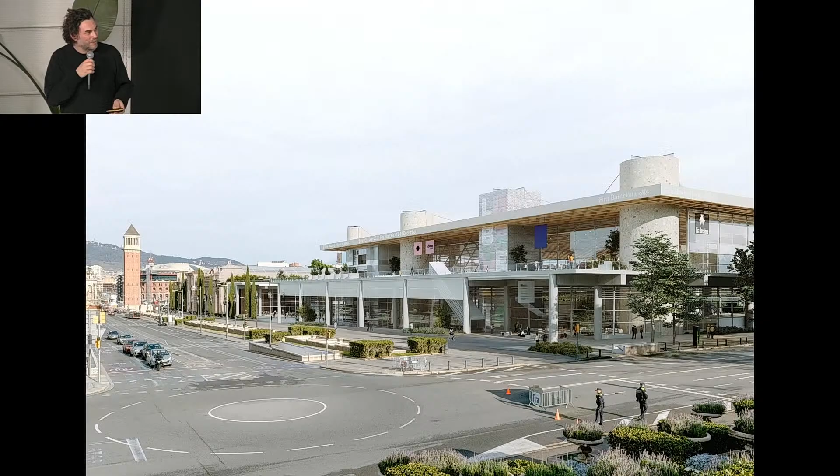I don't believe I really saw the project. I mean, I saw some pictures, and I believe it's really different from what we produce. So probably we missed something, but we were really proud of our position.

But what we like in the Villa in Carthage from Le Corbusier, and in a lot of his projects, is that he makes rules but with a lot of exceptions. There's this DIY, bricolage, non-high-tech architecture that we like a bit more - unstable in how it's built. So yes, for sure we are influenced by Le Corbusier, but not exactly by the five points, I believe.

One more question? Well... So thank you, I think so.

You've explained a lot about the performance of the building. All the time you're talking about how you make a strong effort to place the different programs so they shape in different ways as conceived, probably during the competitions. So architecture is a performance in your case, but I miss something about materiality in your explanation. For example, in La Fira, which is a huge structure, what about refurbishing or repurposing? Was that a possibility? Because we're in a moment where we have to think about new materialities in architecture - all your buildings are concrete. What does this concrete mean for you?